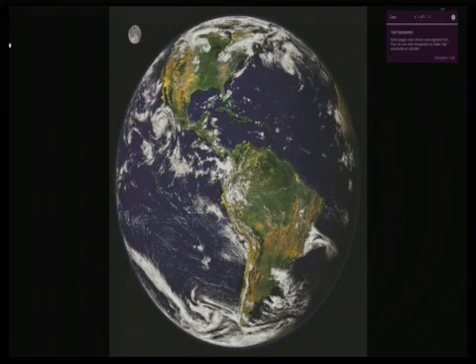So that's kind of what's going on there. I'm just going to skip ahead because some of that we'll talk about, what we can do to clean up our recycling stream and that sort of thing. So when we get to that, we get to the point of domestic mills.

So how did we get here? Years ago, domestic mills, beginning probably in 2005, 2006, really started quality control, and they wanted more quality. There's several things going on. In our business, we kind of call the change in the recycling bin the evolving ton. Because as you know, when our program started, piles of newspaper looked like newspaper. I kind of wish I had pictures now, how many newspapers are there?

But the scrap paper grew, and then when we commingled things, which we should have the ability to sort those out if only the things that are on our list go in the bin. So we get some things that aren't on the list in the bin, and they cause some problems, and we'll talk about that a little bit in a minute.

So the evolving ton, all of these things, China—then our domestic mills were saying, hey, we have to sort all this out, we're not sure we can use that fiber. They've had to change their chemistry, do some things anyway. So then China came around and said, hey, we'll take it all mixed. That was like a decade ago, or a little over a decade ago.

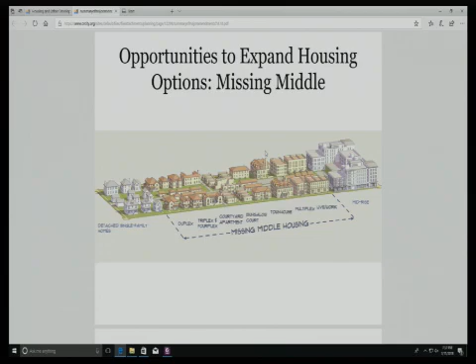So what's interesting is when you compare the newer parts of the city to the older parts of the city, you see some of that diversity, which is not only providing that additional housing need, but in some cases it's also compatible with the adjacent single-family neighborhoods. In some cases it's not, but that's a lot of a question of design.

So all of the things that I referred to on the website are detailed code changes. We're not going to go into those; we're just trying to keep this at a high level. If people want to go in and see what the code changes are, they're all redlined, and the existing code is either shown as struck out or added additions, so you can look at each code chapter and see what the changes are. But this will be an overview of what those code changes are, and I'm going to discuss these by unit type. So I need to explain this chart at the bottom.

We have the line at the top that indicates a change in the code is proposed. The green color indicates that single-family detached homes are already a permitted use in that zone district. Red means it's not permitted in the R2 zone. So what's changing in this slide is basically nothing—single-family detached homes in all residential districts will always continue to be a permitted use. Most of the changes will come with other types of housing.

With this, there are some modifications to our single-family design standards that make things simpler, including making the setbacks for all the zones match one another. Currently, for a particular zone it might say 7 foot on one side and 9 foot on the other. In this proposal, it would say 7 foot in a certain zone or 5 foot in a certain zone.

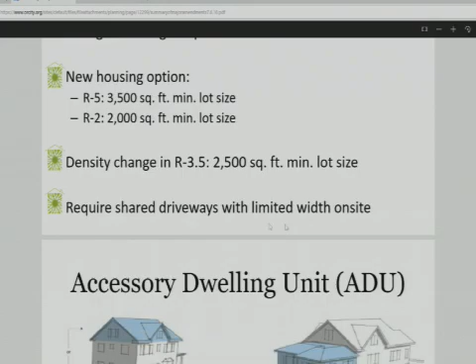Accessory dwelling units have long been permitted in the city in virtually all of our zones. The only change here is that they would now be permitted in the R2 zone in addition to apartments—so if you had a regular apartment unit, you could build a small accessory unit as well.

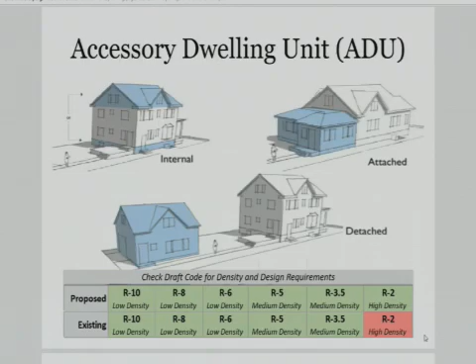With accessory dwelling units, we'll have a brochure to help people navigate the ADU process, with likely costs so they can predict whether it's a worthwhile economic decision to build one. There would be a 20-foot maximum height limit. This change allows you to use more of your lot to accommodate an ADU, and allows for a slightly bigger ADU than previously permitted—it was previously 40% of your existing dwelling, and this proposal would allow it to be larger. It would still require that exterior building materials be compatible.

The next category we're talking about is manufactured home parks. We have 4 existing manufactured home parks in the city limits and 6 in the urban growth boundary out in the county. Those are currently considered non-conforming uses under the R3.5 zone, which puts them in a position where they can't do anything without a conditional use process—one that's pretty onerous for someone who just wants to add a couple of manufactured homes, modify an open space, or add a play area.

So the proposal here is to make manufactured home parks a permitted use in the R3.5 zone, along with some design standards which closely resemble the state manufactured home park code, putting us more in line with that code.

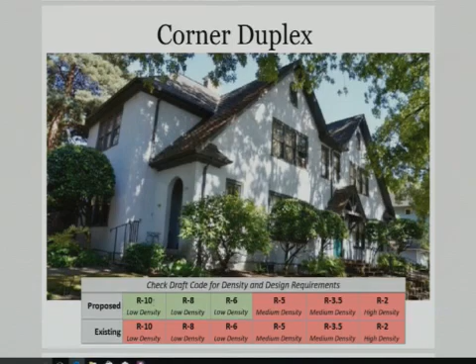The requirement here would be that these are permitted in the R10, R8, R6 zones. So they would be compatible with low-density residential areas on the same size lots.

Is that a person then can actually convert an existing dwelling unit into a duplex under this code? They could. We call that an internal conversion, which I'm going to talk about next. So that's actually a new proposal as well.

In this case, the requirement would be there's not more than one door on the front of the building. So the access to the second unit would be interior or at the side or rear of the building, so it would look like a single-family house.

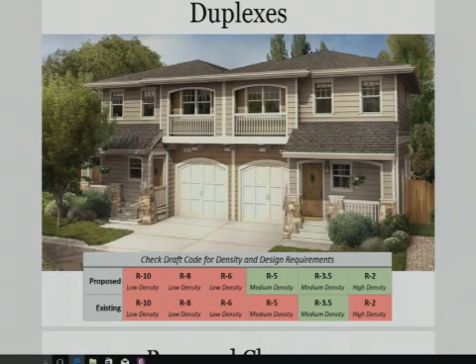Duplexes is a category that, this is not an actual example, this is from a brochure, but it's a popular option in a lot of neighborhoods that are older.

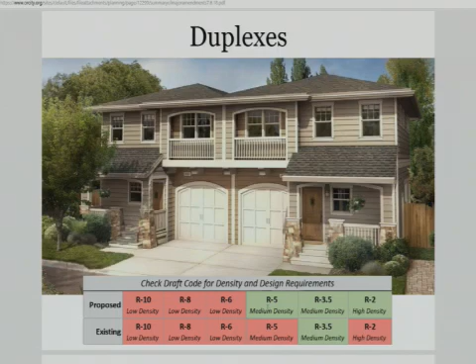Proposal is to allow duplexes in the R5, R3.5, and R2 zones under the following standards. For the R5 zone, you would be able to build a duplex on a 5,000 square foot lot. R3.5 would require 3,500 square feet per unit, which is the current standard. In the R2 zone, you'd need 4,000 square feet to build a duplex.

Where are R2 zones? That's a great question. I don't have a zoning map in the presentation, but an example of the R2 zone is the area next to the high school north of Glen Oak Road, Sequoia Landing and Sequoia Crossing developments, to the west of the high school. But we don't create new R2 zones, I presume.

In the concept plan areas, yes, the areas designated as high-density residential would be zoned R2 if annexed into the city. But they don't constitute a lot of the acreage of those areas. I'd be hazarding a guess, but there's probably about 40 to 50 acres total out of close to 900 gross acres in the concept plan areas.

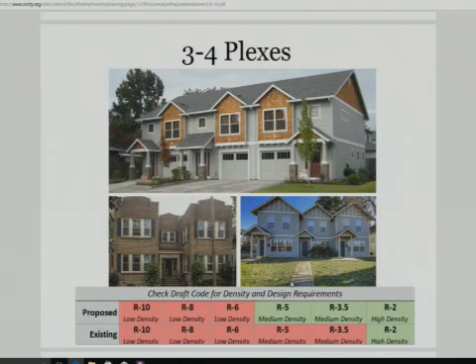Cluster housing is a new name for what we would call cottage housing. We have cottage housing code on the books since 2008, but haven't seen any of these built yet. Part of the reason may be because the code we have is a little stringent and prescriptive. What would remain in the code with this proposal is the requirement that you have cottage-type units, smaller housing units centered on a central open space area. This development type allows you to slightly increase the density above and beyond what is normally allowed in that zone, but it has very strict controls in terms of the overall building footprint.

Currently, you can't build bigger than a 1,200 square foot living area with this code. What we heard from the group and from some of the builders was that if that was increased slightly to 1,500 square feet, it would be an economically feasible development model. The other recommendation was that if these cottages were allowed to be divided into separate lots, they would build them as fee simple units. They would still meet the design requirements, but there's slightly greater flexibility for open space and design in this case, and it's a new housing option in the R2 zone, the high density zone.

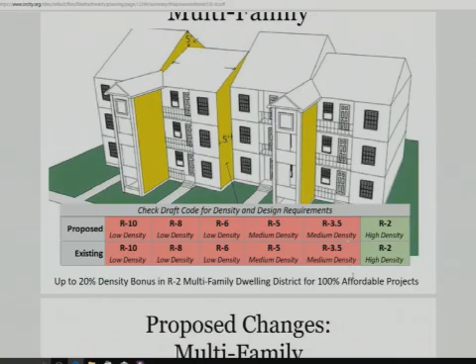All right, I'm going to skip through some of these. Multifamily housing isn't really changing in terms of the use permissions—it's going to remain a permitted use in the R2 zone. But we are adding a provision that if a multifamily project is a publicly subsidized, affordable project where 100% of the units are regulated to be affordable to people who make less than 80% of the median family income, they would qualify for what's called a density bonus to add more units, either vertically or horizontally, to accommodate affordable housing. That would only be applicable in the R2 zone for apartments.

There's some changes to the architectural standards to simplify them. Currently we have very complicated requirements for how a building is articulated architecturally on the exterior. The proposal here is to still have visual interest and breakup of the exterior walls so we don't get just blank boxes, but it's slightly simpler to meet those standards.

Open space requirements would be more flexible. You would be able to do a variety of open space proposals, either rooftop gardens, balconies, interior courtyards that aren't necessarily right on the street, but could be more internal to the site. Those kinds of provisions we run into from time to time where developers say, I can't make this happen on this site, is there anything else I can do?

So that was a recommendation coming out of this as well. Now, if somebody were to build something with an internal open space, could that reduce the setbacks they would have? I think that alone might not, but the setbacks for this zone are fairly small to begin with. You can put a multifamily project 5 feet from the property line. You can make it larger if you put in a courtyard or a pedestrian area.

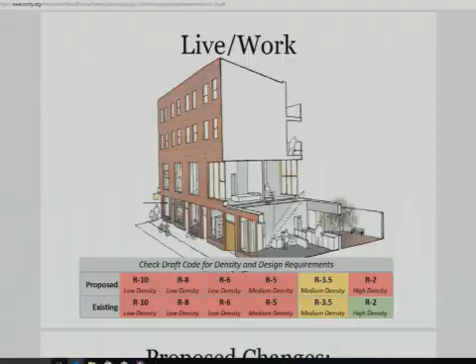When you say live-work, that doesn't mean the people that occupy a residence there necessarily have to be working out of their house. It's just that the bottom floor is either an office or what we call a mixed-use development. I want to take a minute there and wonder why that really hasn't caught on in the downtown area at all.

Yeah, well, the downtown area has been challenged for residential development because of seismic requirements and some of the older buildings that would have to be seismically upgraded to accommodate residential use.

And that may not be the only thing. There are some pretty steep system development charges associated with converting older buildings to residential lofts, and the market hasn't caught up yet in Oregon City.

I think with the advent of the Cove development and some of the other urban renewal properties where people are proposing exactly this on city-owned property, hopefully we will get an example that other developers can point to and say, look, it can be built here. But it is fairly costly to do right now.

But I guess on those areas, given the nature of the Cove and so forth, you use the word equitable housing and not affordable housing. My guess is the renters that are going to live at the Cove are not in need of affordable housing. Right, it's going to be more expensive. And my concern is how do you incentivize these things to make sure it's directed to the segment of the population you want it directed to?

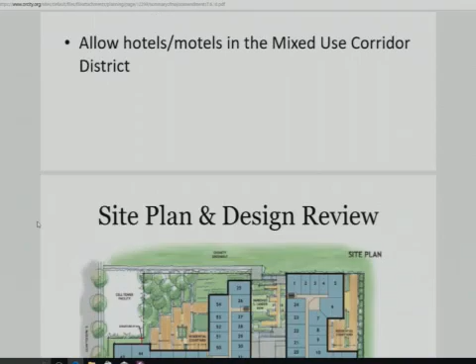We'll be simplifying all of our process worksheets for site plan and design review, and adding some procedures that allow what I refer to as 3 to 4 plexes to potentially be permitted through what we call a type 1 site plan and design review process, but that's something we're still working on.

There's some discussion of permitting food carts in the Willamette Falls downtown district. And we're going to be consolidating some of our chapters into other chapters to make it simpler to find things.

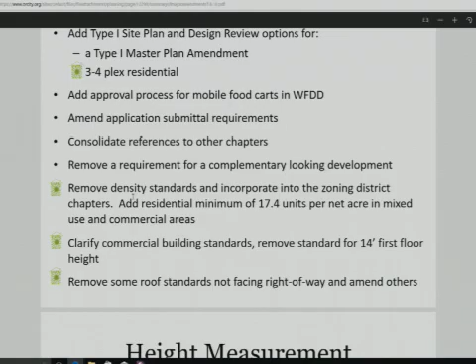Height measurement will be modified so that we will only refer to height measurement in feet rather than stories. So you measure from finished grade to the top of the building. And in the floodplain, because you're required to build above the floodplain, you'll be measured from the floodplain. That's not something that currently is in the code, but it has led to problems.

So if you're in the floodplain and your dwelling would be, say, 4 feet below the floodplain, you start measuring from that floodplain elevation up. You can have certain types of development below the floodplain that aren't habitable space, like parking, streets, or even driveways.

You know, the Willamette Falls Community Center there on Washington is a great example of it. They did that before we had the code, but it was a good example where it's all parking underneath. So this would equalize the playing field for anybody who's got to develop in the floodplain, allowing them to realize the full potential of that height allowance.

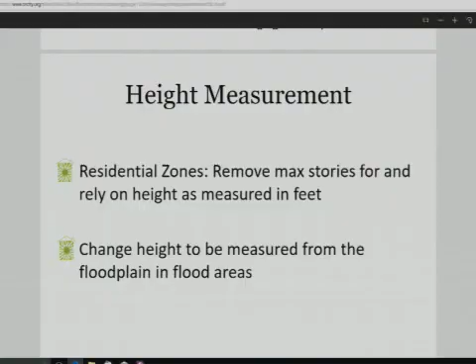We currently have what's called a master plan process for institutional development, but it doesn't really address residential development or allow for innovative projects that might need adjustments from the code. These are called planned unit developments. The idea is to amend the current master plan ordinance to have more standards for residential development and add it back in as an option for people.

So you could be mixing up diversity of housing type, adding open space, incorporating wetlands, shifting densities around. That would be an option for properties in the concept plan area, but where there are bigger parcels that you could develop, they'd go to the planning commission to get approval. So it's not a staff-level approval, it's something that would be discretionary with the planning commission.

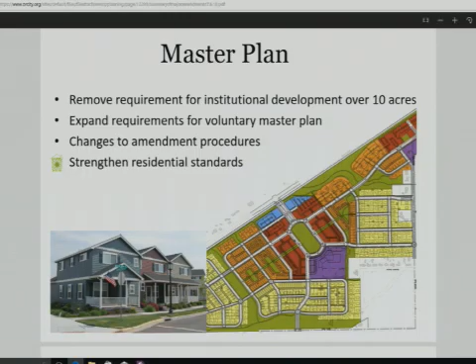Could you go back? Yeah. So currently... I'm just considering, what does that do to the view corridor? Well, we'll have to wrestle with that question because it is within the view corridor of the Willamette River.

So the idea behind mobile food carts is that they would be permitted on the Willamette Falls Design District, which is the Blue Heron site. They would be allowed for up to 5 hours within a 24-hour period. This idea has not been fleshed out fully yet. In Portland, those are regulated as vehicles. In Oregon City, there's probably a requirement that these be hooked up to some sort of permanent water or sewer system, which may not be feasible for them, but we'll work through that.

The other code change that would be proposed is to allow parking lots overnight to be used for general parking when not needed by businesses in the mixed-use corridor and downtown districts.

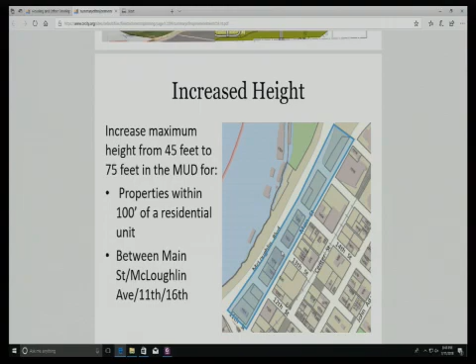Yeah, the height limit is already 75 feet in the mixed-use downtown, except within what they call the design district. I think this portion of the area is called out in blue as the downtown design district. The idea behind the downtown design district was to preserve some of the building height with the older historic buildings that weren't quite as high, but I don't know all of it—there's a lot of history there, so I don't want to speak out of turn.

Thank you, and let me know if you have any questions moving forward about this project. We're going to be doing a lot more public outreach. People can get a hold of me anytime if they have questions. I think the public open house from 4 to 6 on the 23rd will have two sets of poster boards - one strictly for the equitable housing side of the project, and another for the other things that are more code cleanup and procedural, just to help people differentiate between them. But they are interrelated, and rather than make two separate processes, we thought it was best to combine them.

All right, thanks. Oh, great. Thank you very much. Maybe I'm glad you brought this up, interesting to watch. That was a good presentation.